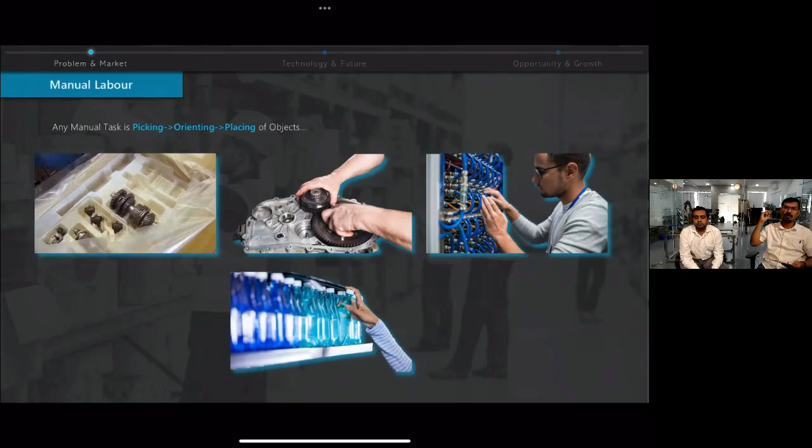And we always hear automation as a word associated along with it, and automation is being prominently spoken about. That's the basis of most of the engineering that we actually do. The world hasn't been quiet about solving this - it's been quite well known as a problem and an active field of study always, and we have progressed significantly.

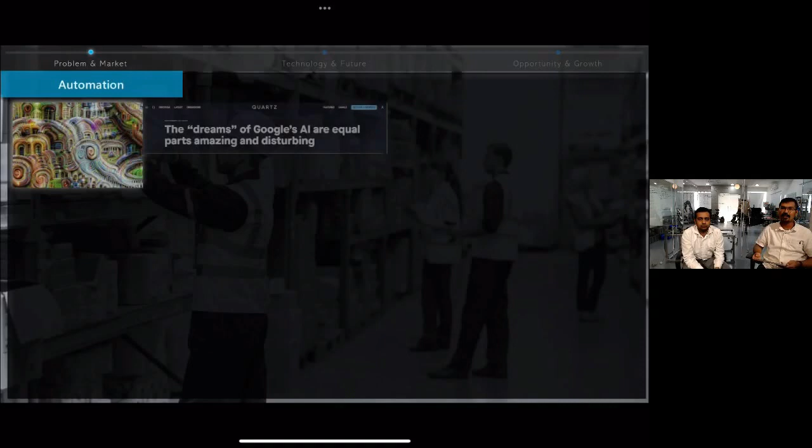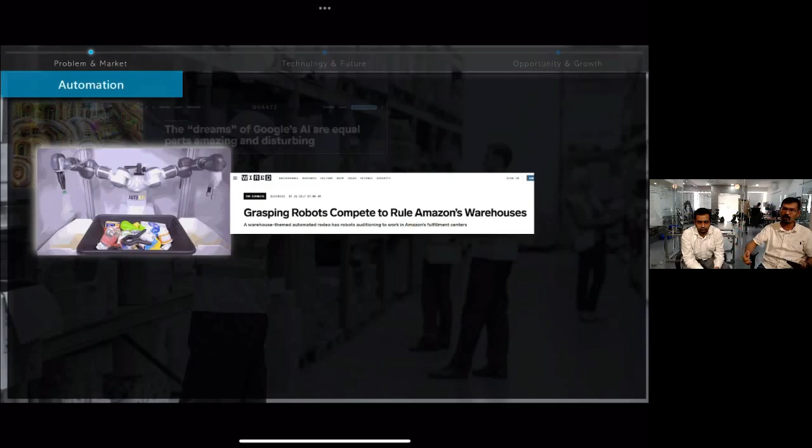We keep hearing about how AI is today and how Google AI is able to dream. We have seen robots from Amazon's Picking Challenge helping in warehouses do the last mile - the pick and place of objects - and packaging systems. We've also seen the star of the robotics world, Boston Dynamics, and things like that. This was a very positive narrative, and people had been actively talking about how AI is going to rule the world and take over most of those portions.

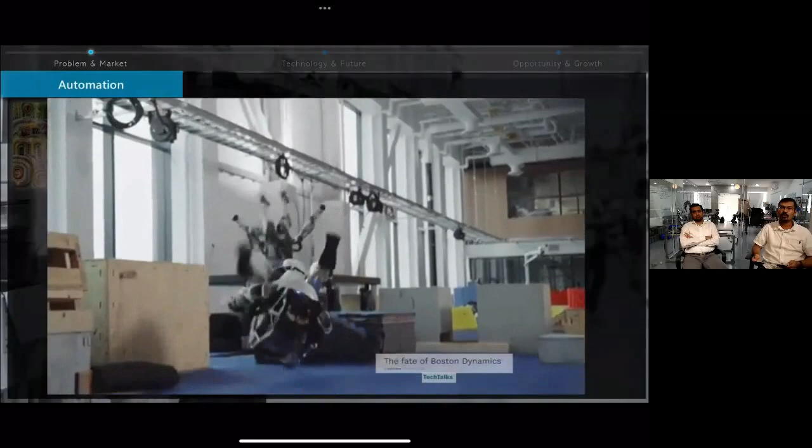Which is really great, but suddenly after a few years a lot of the story has changed, the perspective has changed. Suddenly the doomsday narrative has moved over and there's more talk about how we are not there yet and how limited our automation really is. It might be a lot of hype, and we may not be there yet.

But if we have to statistically understand this beyond what we hear - because we're surrounded by a lot of different perspectives and opinions - if we step a little into the statistics, the 2017 McKinsey report clearly states that around 31% of the time spent... what do we mean by that? To make a product, you have a variety of different tasks that happen on a day-to-day basis.

So if you go into a manufacturing plant, and in fact as a precursor to that, if you just look around you - every object that you utilize today, be it the food that you eat, the spectacles I wear, the shirt I put on, and the things I've consumed all through the day including the water - has come out of some portion of a factory today. If you look at how that has been segregated, there are multiple different varieties of tasks that happen, from decision making to expertise being applied, to data collection, to data logging, to observations, and then the physical labor.

Where someone uses their hand, coordinated eyes and hands, to perform all of this, and logistics for the case - that is more than 31%. That's the largest chunk across every domain, be it manufacturing, agriculture, transportation, accommodation, whatsoever it is, the human hand's presence is very high.

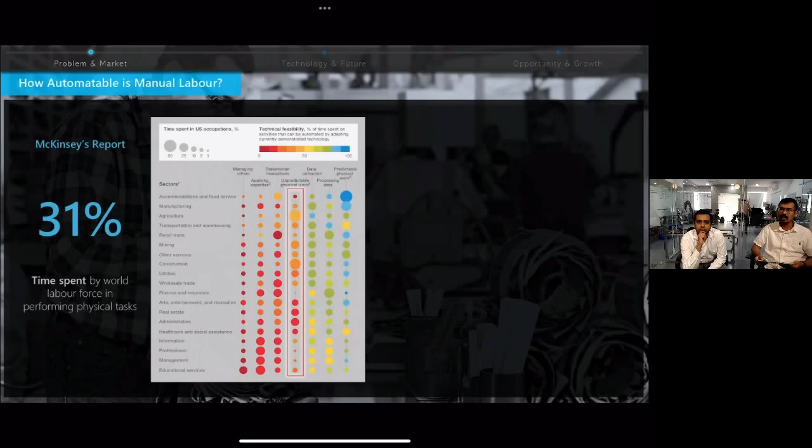And if it's just boiling down to the human hand, and like we spoke about, picking, orienting, placing is the task, we have obviously heard about robotic arms. There are so many robotic arms typically in the market, and we've seen many videos of how they operate and solve certain applications. But if you look at the size of the robotic arm market, that's also not small - it's almost a $16 billion market.

And what is more surprising is those robotic arms also need a lot of engineering around them. Somebody will have to go and do the programming, somebody will have to assist them. They are not out of the box where you can just keep it there and the system learns and starts doing that, in spite of the AI we actually have. But that is the $32 billion market, which is very healthy and quite significant.

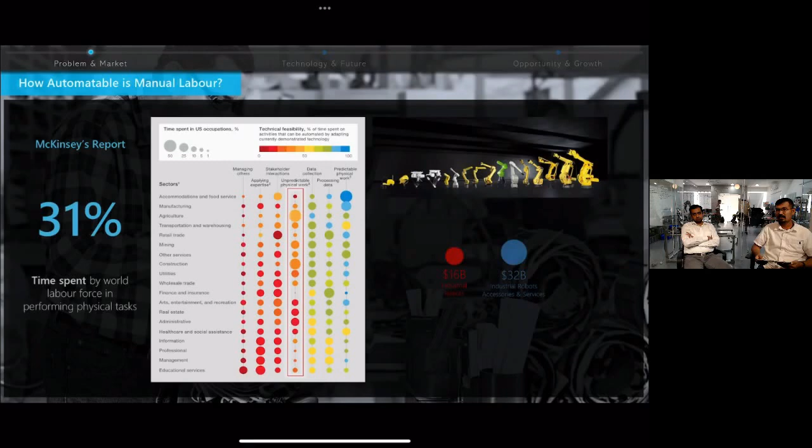But that also brings another question - how true could this be, how hard could it be, what is the perspective or proportionality of the automation that happens, and where we stop. Instead of me speaking about it, I'll let the person who managed to bring the rocket back and land it on Earth speak about it.

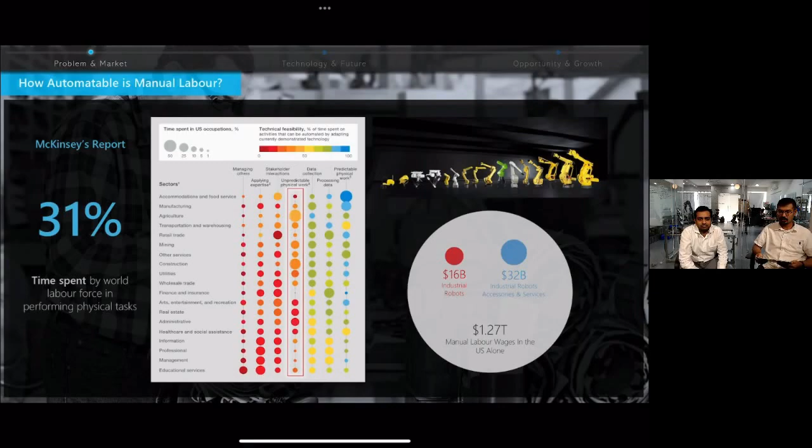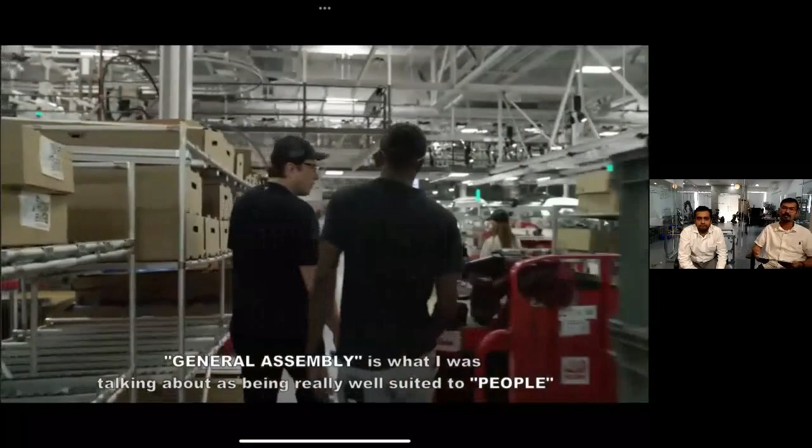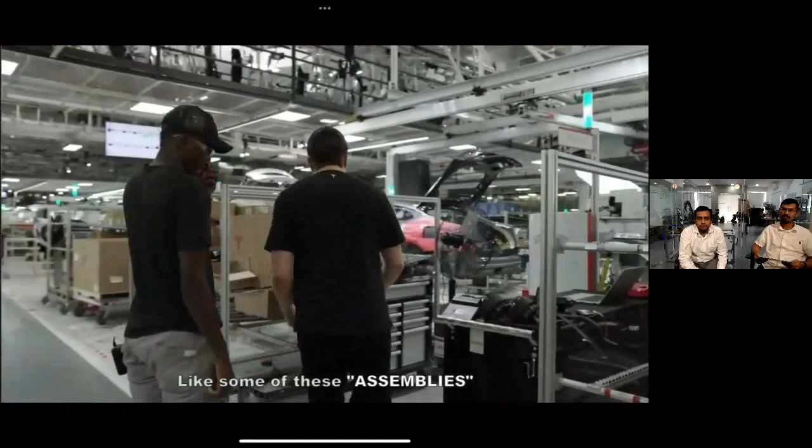So if you just look at the man who managed to land the rocket back, you can get a good sense for there's like General Assembly, which is what I was talking about, being really well suited to people. Because you've got a lot of weird things that you have to put together - look at some of these assemblies, it's pretty hard for a robot to connect this on.

That makes sense - depending on how it comes out of the box, it could be in a little different position. But it's pretty easy for somebody to say, oh, I just need to move it like an inch, bolt it in. It's probably really hard to write software to adapt in all these different ways. So if you try to have the robot do this, you've got to have a complicated vision system, and then the vision system faults out - it's not quite right, that's the hard part. We have a robot in our studio that moves the camera around, and the hardest part is when it faults. You need a person there to know what to do. Exactly.

In fact, that was reflected very well in his sequence of statements. In 2017, he had the Model 3 released, and he had bookings of over several hundred thousand. He was gung-ho, Elon Musk being Elon Musk, saying we would be able to automate this - I'm exposed to the level of AI that is there, and automation is something we could do very well, and we should be able to address this demand. But a year later, they happened to do only 30,000 cars that they were able to release. In fact, Elon Musk came out and said that we underestimate human capability, and we overestimate the technology that exists for automation.

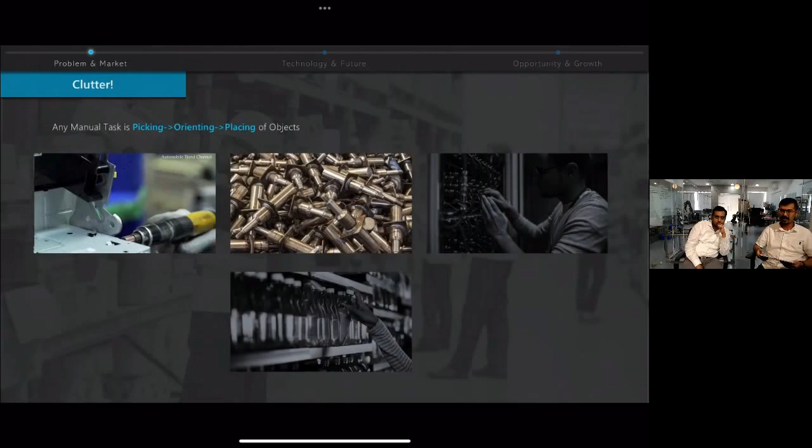To study that, maybe we'll have to look at each of the sectors we saw before. It's all about picking, orienting, and placing, except it's not just the hands doing the picking, orienting, and placing - it's often the scenario in which they're supposed to do it. Your environment is constantly being put into an unpredictable scenario. Behind these clean manufacturing places where you do precise placement of components, someone has to pick from a clutter from which they came. If you have to do clean wiring, the wires are always entangled - how do you understand how to put the wires together?

All these clean, stack-arranged warehouses from which robotic arms can pick - behind them is a complicated scenario of a plethora of objects coming from their native places. From logistics, when they come inside, they're not going to come arranged. It's too hard for us to keep them all arranged. Even the variations become a hard problem today. So they're all in an unpredictable and cluttered environment.

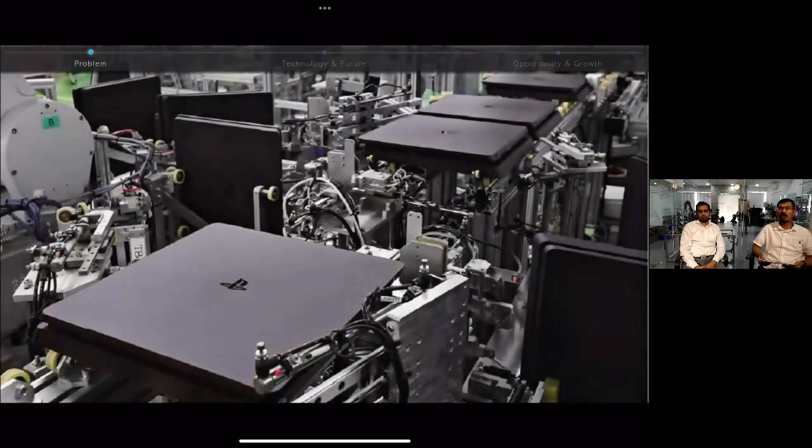Now, to see how automation could happen for all of these things when you have to structure them - here is a picture on your screen. You can recognize the PlayStations, and this is a PlayStation assembly automation, where someone is manufacturing and putting together the PlayStation. If you look, beyond the easily recognizable PlayStations, you also see a very complicated myriad of sensors, mechanisms, contraptions, wires running through here and there, and each of this needs a phenomenal amount of engineering or mechanical design.

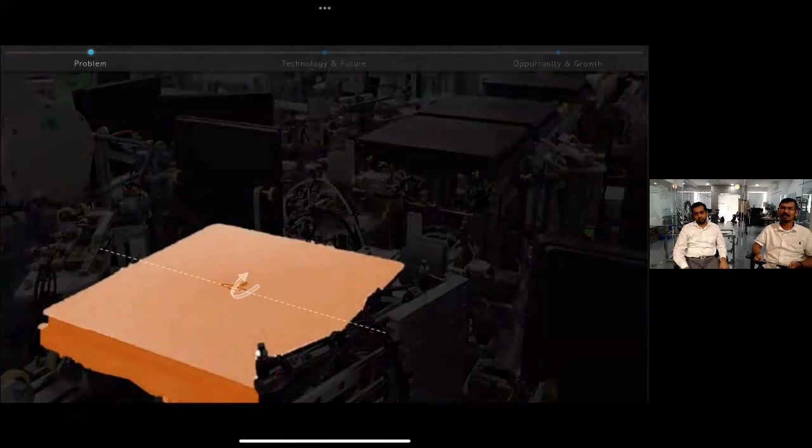The corner portion you see is basically your robotic arm at the base - this is all your different kinds of sensors and complicated engineering infrastructure. What could this be doing? Obviously this has to be something for a very complicated activity they must be doing, right? Unfortunately, all that they do is just flip the PlayStation from a horizontal position to a vertical position. This simple action today actually takes so much hardware.

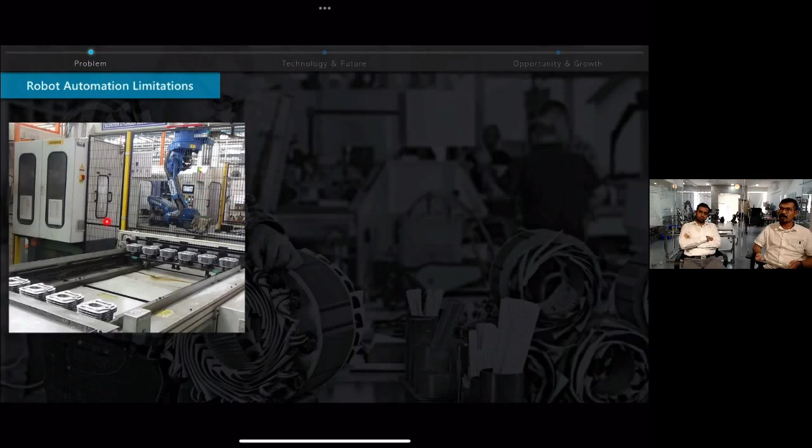The parts are being fed into it, and you have all these parts coming here. This fellow will pick from this table these parts, which are engine casings and cylinder casings, and present them into the CNC machines for the processing they're supposed to do. These are the cases where you're able to automate it, where you're able to put a robotic arm. But behind that scene, what actually happens is this.

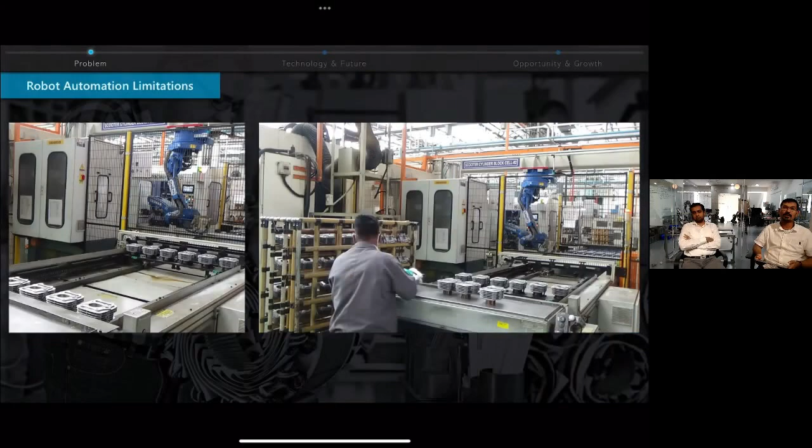There is a person who is actually picking those parts again from within a bamboo structure that has been put, and then he has to arrange them on a pre-built, customized conveying system. And the conveying system again goes and presents to the robotic arm. Obviously that brings a question: why can't a person just directly pick and place it in there? It's just about the amount of poka-yoke you can put in this case, and how well and organized they could get in presenting these parts.

So we need predictability and precision. That's the major driver of robotic arms today, or automation today, but they're still not yet there. There are some parts that you would not be able to put into those arrangements.

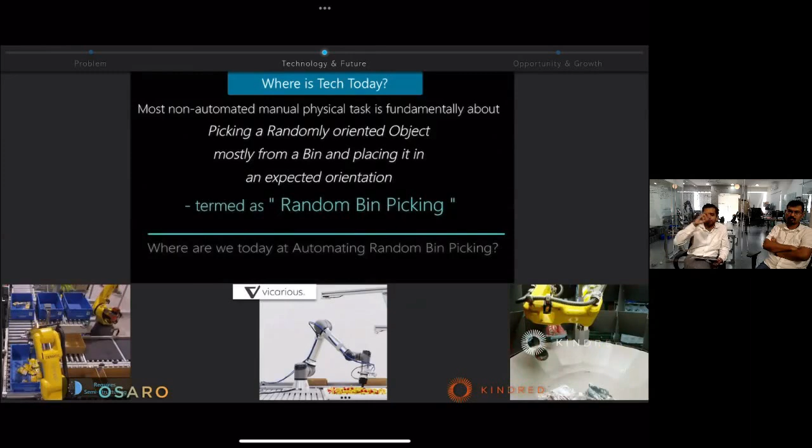In fact, ever since the first robotic arm was launched, probably 4 or 5 decades ago, we've been imagining that eventually robots will be able to do that. It's just that it has turned out to be such an elusive problem for the industry to solve. To understand why it's so elusive, we have to go deeper into understanding where tech is today, how tech has been approached all this while. If you look through the internet, there are quite a lot of players using different kinds of vision technology, but predominantly everybody rallies around 3D imaging, because you're living in the 3D world, you need to go grasp objects in the 3D world.

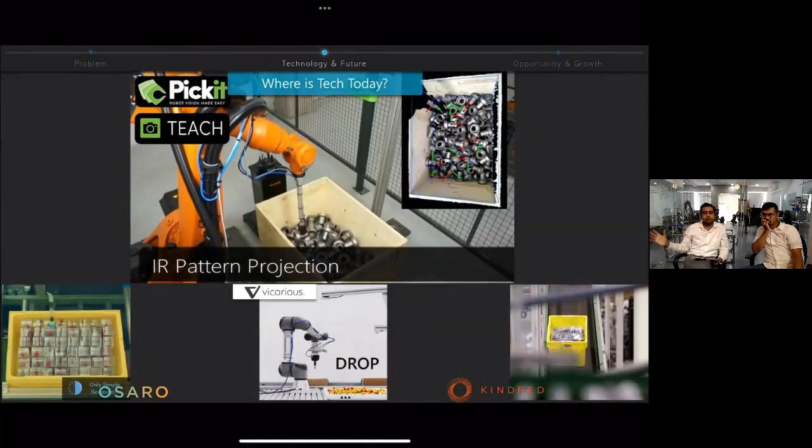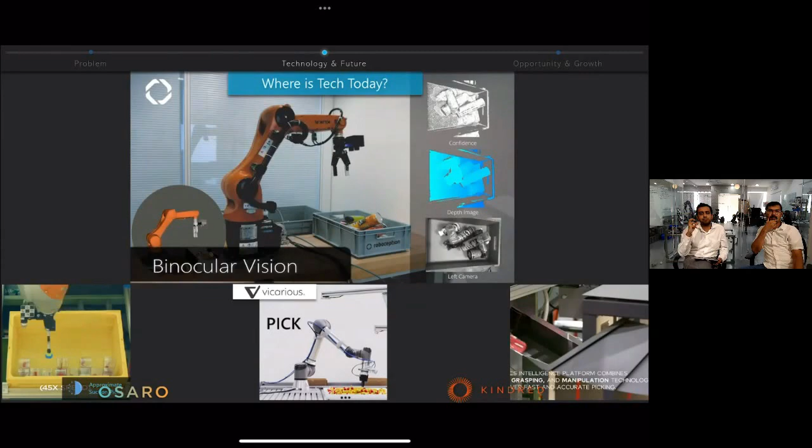So 3D imaging is required. You can construct 3D images using stereoscopy or different mechanisms to construct 3D depth maps, and the assumption is that that is enough. But the challenge is that all of these 3D imaging methods give fairly sparse depth information. In fact, the information you get out of a depth image is even lesser than the information you'll get out of a 2D color image.

Because of this sparseness, what you're able to achieve at best is working with simple geometry objects. And even then, you're only able to approximately locate an object, go touch that object, and assume that if it sticks to the gripper, you can go somewhere and drop it. The moment you drop it, you lose the orientation of the object. So all of these solutions at best can do a touch and drop kind of scenario.

That's okay if the application is to sort from a randomized bin, but you cannot build a car by dropping 10,000 parts on each other. When you're building a car, you need to pick every single object, reorient and place them in a very specific manner, pick bolts, reorient and place them, and assemble very specifically. The current solutions don't really scale to doing that.

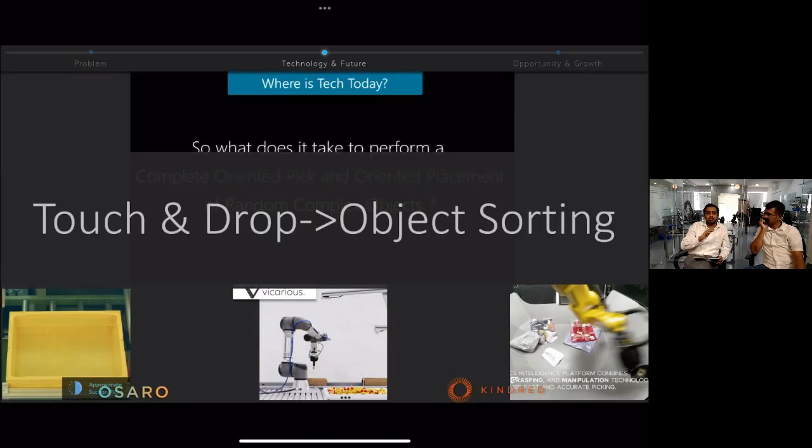Again, from a methodology point of view, all these systems, even using vision, follow this typical paradigm: you acquire images, either 2D or 3D, and train a neural network with a lot of static images previously obtained. And with that, you train a neural network. What the neural network can at best do is localize where that object is, probably draw the boundary of that object. And it is assumed that kind of information is enough to give to a robotic arm, and then the robotic arm figures out how to go and pick.

And this is fundamentally flawed. This is very different from how human beings work. Human beings have a lot more dynamic capturing. If we don't have the right kind of information about an object, we move. We look around, we are able to hold the object, pick the object, etc.

This existing paradigm is also limiting because vision and manipulation are assumed to be decoupled. The vision training happens separately, robot training happens separately, whereas human beings don't do that. As a baby, hand and eye coordination is learned hand in hand, and that's how we really learn. When we pick an object, we learn the object after picking it, and that's something we have as a unique ability.

Most importantly, the assumption is that the world of vision is all about interpreting color, and that's an obvious assumption to make. Don't we see the world only in color? We interpret colors and classify objects in the world through color. But to elucidate, that probably is not enough.

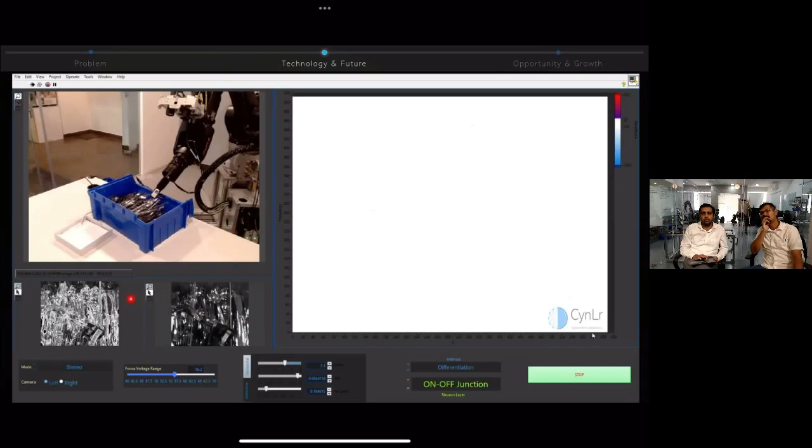What you will observe here is that we're able to extract the outline of the spoon, which is a mirror finished spoon, effectively from the background, even though the background is a fairly cluttered cacophony of colors. If you just look at this portion of the video, you'll see that the background is extremely complicated. Standard edge detection algorithms don't really work, it's extremely difficult to extract, but the event imaging algorithm allows you to extract that fairly well.

This is not just enough. When you're really dealing with objects in the real world, there are a lot of other parameters that the system must cumulatively learn. Color is not the only information that one learns. To manipulate an object, you need to learn the shape of the object, the size and the rigidity of the object, whether it's a squishy object or a solid rigid object, and what the surface parameters of the object are.

So for any complex object from different orientations, you have infinite possibilities of shapes, and that makes it a perpetually challenging, perpetual training exercise if you really go about training for every single orientation. This is one challenge that the world of automation has not been able to solve. So far, we've been focusing only on understanding color and location, and with that you can do a few set of applications. But the moment you start learning the entirety of the object model, we will be able to solve use cases much more complicated.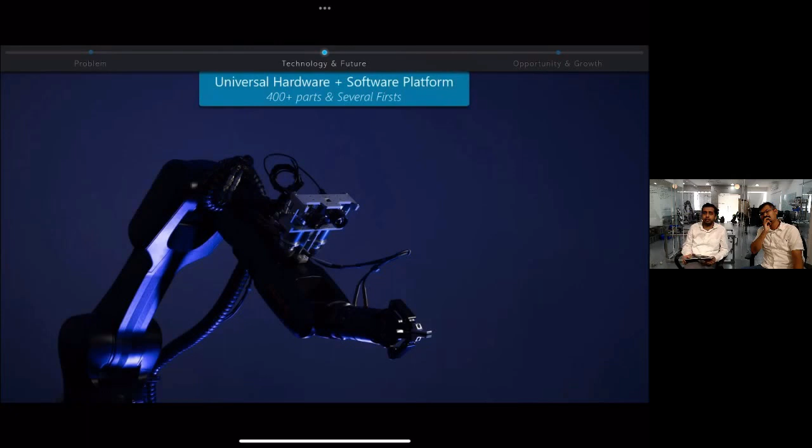To just give you a very quick glimpse, I have one demo video in the next slide. But fundamentally, the technology that we have built is a hardware layer on the vision side, which closely mimics the human eye.

So we have autofocus optics and convergence, which allows us to move our eyes towards and further away from each other. And with this, we're able to interpret the different parameters of an object. We've also ended up building the world's fastest and highest resolution depth perception system in the process.

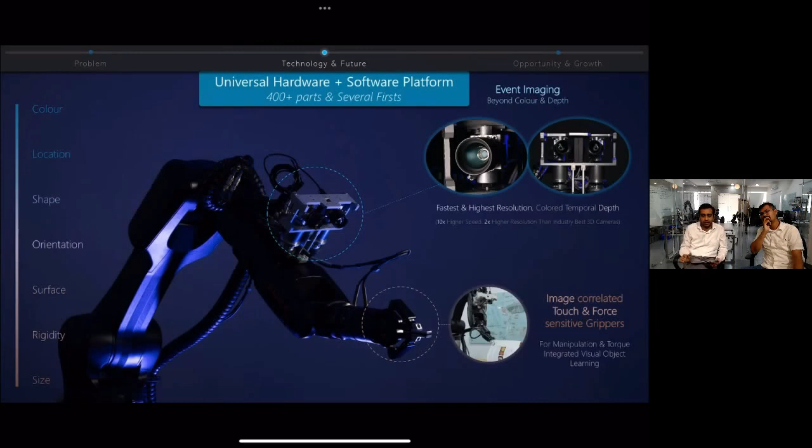We also integrate this vision with touch and force sensitivity, so we understand the physics of the object more than just the visual parameters. Because of these layers, what we're able to do is grasp objects or do tasks on objects that were previously not possible.

In this video, on the left part you see one of our team members playing with the robot. He will be presenting different objects to the robot. On the top right you see one of the cameras, what it sees, and the bottom right is what the event imaging algorithm really sees.

You will see here that the robot dynamically tracks objects. Even if the background is fairly cluttered, you see people, you see different kinds of objects, this background is constantly changing, but it's still able to track the object.

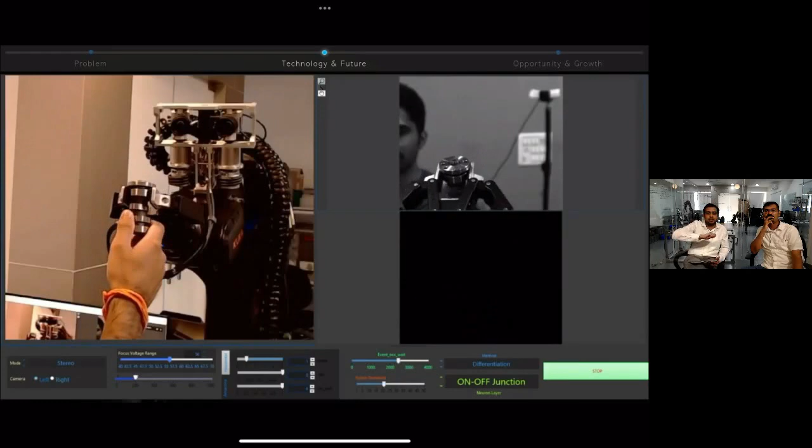And the best part is that none of the objects being presented to the robot today have been previously trained on. The robots have never seen these objects, but still we are able to do basic grasp, regardless of what orientation you're giving, even if it's a mirror finished part, or even if it's a part like this Lay's packet, which is very flexible.

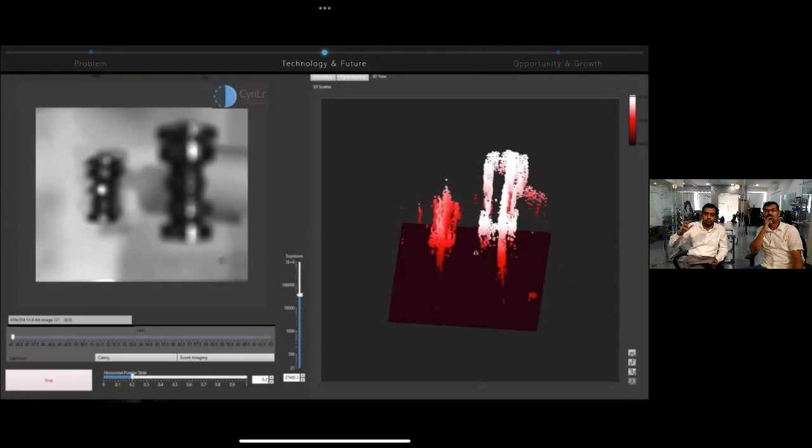It knows how to adjust the force and not pop the packet, and we're able to do that because of how we interpret these objects. We have a hierarchical way of interpreting depth, and event imaging allows us to extract information out of the background, only focusing on the changes.

With this technology, you can open up a lot of possibilities, right? On how this technology will become very fundamental in opening up a new paradigm for automation, I will hand it back to Gokul to talk about how this is going to be the genesis of the future in robotics, to bring about a vision of what this could do.

So there is a robotic arm, there is something that is actually having a vision system, and probably most of the details of it we will understand much more in depth once we come inside, once we get the exposure to it.

But what can it actually do? What is this manual labor change that we're talking about? What is it that we are talking about from a manufacturing point of view? To understand that better, I seek the help of an analogy.

This analogy is pretty much true and very closely related on the basis of physics, as fundamental physics. We have seen the world that we know today. All of us are programmers, all of us use laptops, all of us use a lot of different items around us. And data is the biggest talk that we have today.

The next oil is data, is what people actually keep talking about. And if you look at it, they all begin in the format of signals. Somewhere or the other, it's a real world signal that we have captured and converted, whether it's touch, somebody's thought being typed out as a physical touch onto your keyboard, or me talking right now. There is a video of us. That's light as information, sound as information coming through to all of you when you are actually having a live event.

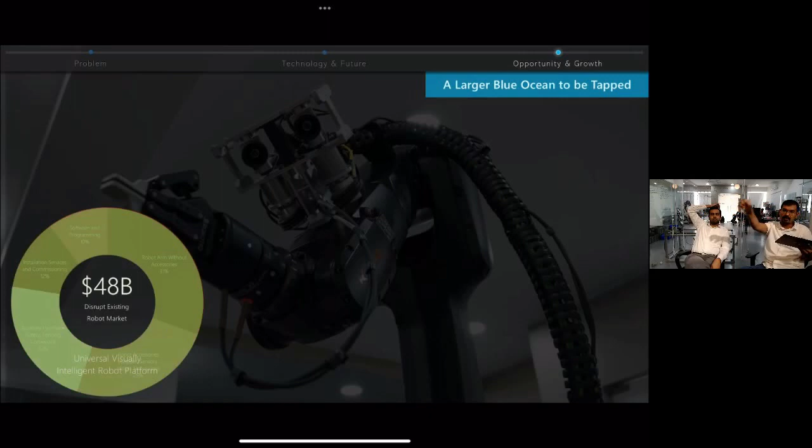If we look at this, how disintegrated the robotic arm market was, with our product maybe we could have simplified this into one unified market, where people don't go about customizing and building it, but can buy this robotic arm off the shelf as one system and start programming and deploying it. But beyond that, often when you standardize something like that, there's a larger market that opens up. Even outside of China, there's a $48 billion market that opens up. We may not be able to do the kitchen thing today, but ten years down the line we'll be able to do it. Today we can open up a market worth $48 billion if we get this to the market and start solving this. That is the next big thing we actually talk about.

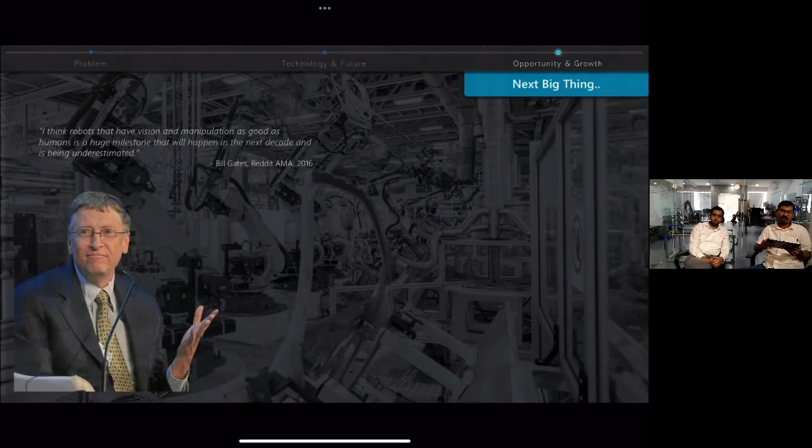It's not just our words. In fact, other stalwarts have been thinking from this point too, and luckily some of these things have been registered in public forums. In 2016, when Bill Gates was on Reddit's Ask Me Anything and was asked what's going to be the next big thing, he said a robotic arm with vision as good as a human being, able to manipulate objects as well as a human being, will be the next big thing. And we underestimate that. In 2019, Jeff Bezos also chimed in on the same point, saying this will be the next big thing to open up in the market.